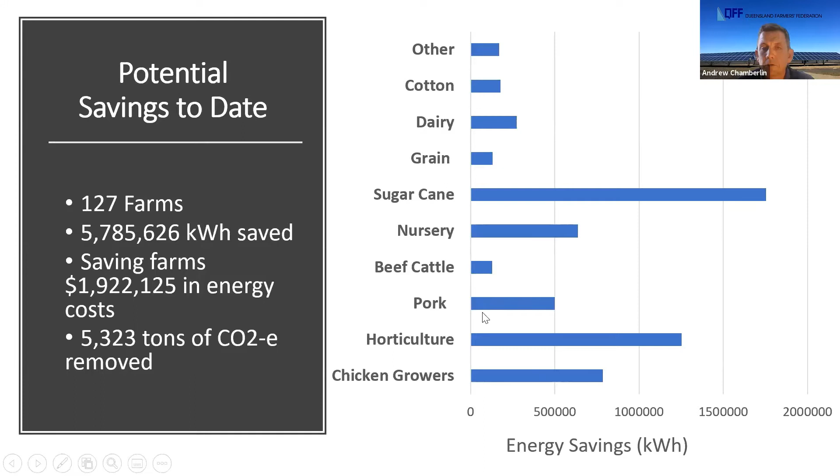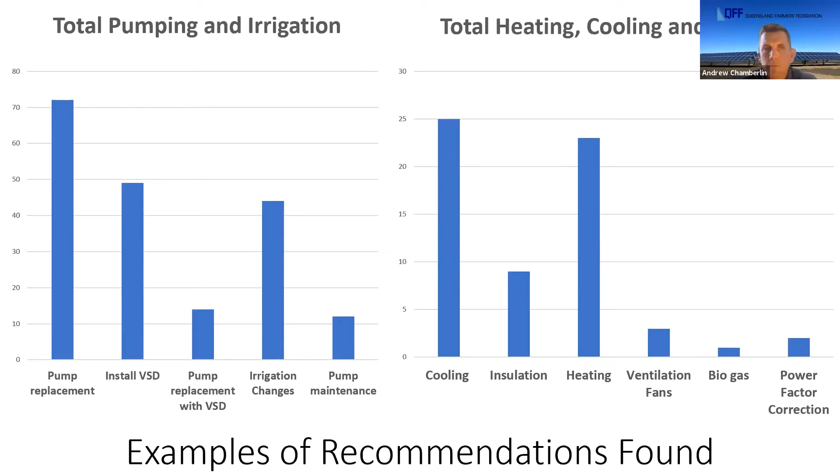These are the kinds of recommendations that we're seeing in the audits. With those sectors that I showed, it'll be no surprise that most of the recommendations are in pumping and irrigation, right through from pump maintenance through to irrigation system changes, installation of VSDs, replacements of pumps, and replacement of pump with VSD in situations. And then some of the other recommendations, there's a big range of projects in cooling and heating, insulation, biogas, and power factor correction. So we're really covering not just the irrigation systems, but the farm sheds and some of the on-farm processing.

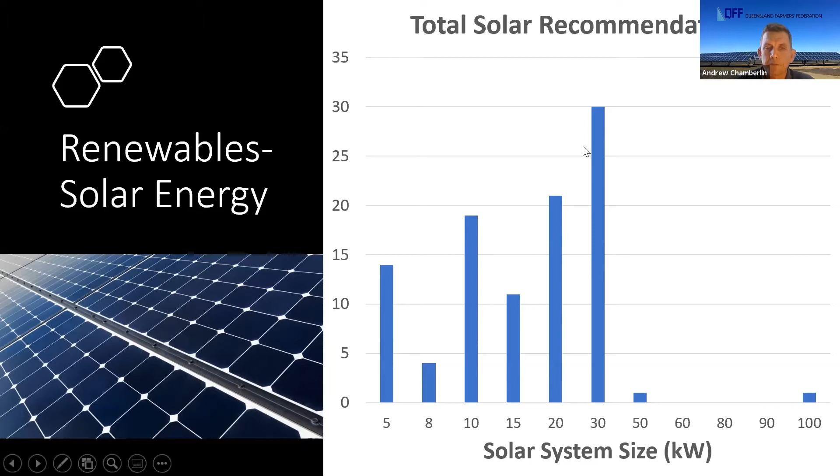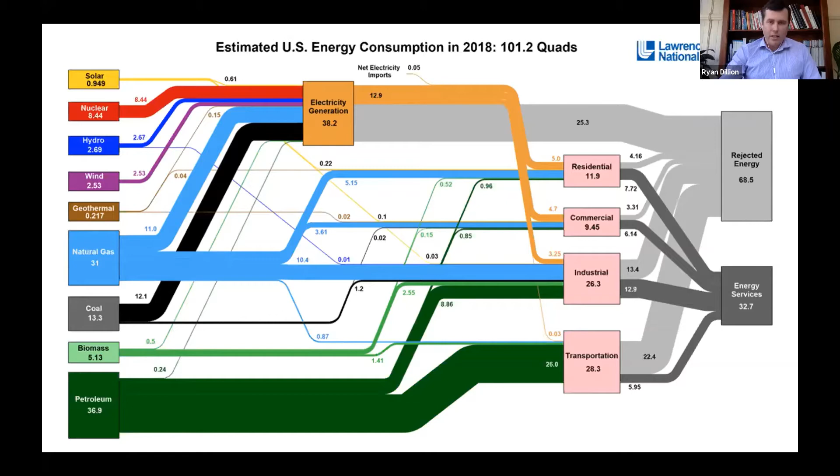So with energy efficiency being a discipline for the last 40 years, it's an interesting reflection that there is so much potential in efficiency. A lot of that's obviously inherently locked in, but there's also a lot of unlocked or unused potential in businesses. And while there's not necessarily key metrics for horticulture or dairies or nursery across the whole economy, where these audits add a little bit of value, perhaps for a little bit of reflection, is how do we actually benchmark in horticulture what that savings potential is.

We'll get to that exact number across 10 medium to large horticultural facilities a little bit later with that prize there. But otherwise, in some of those key sectors, kicking off with dairy, for instance, after the level 2 audit, in most instances for the 3 sites examined, we had between 35 to 50% reduction in energy costs available that was cost effective with a combination of energy efficiency and some advanced renewables. Really interesting to see across the board, 35 to 50% is actually still available and cost effective.

Going through what some of those jelly beans actually were within dairy, we've got a few icons here with the major energy savings, moderate energy savings using a different icon, as well as some definite priority areas of investigation and findings from the audit, just to highlight what was more or less important and what you should definitely look out for on your site.

One of the priority areas was compressed air. The chart here on the right shows the diameter of a leak, and you can see the kilowatt hours saved through fixing that leak on the y-axis. In this example, a 3 mil diameter leak, or combinations of leaks, could have around 25,900 kilowatt hours in energy wastage. Compressed air is often called the 4th utility: energy, water, gas, and compressed air. With compressed air, 80 to 90% is heat or rejected energy that doesn't provide value-added energy, and compressed air is just really expensive. So looking for leaks did bear some results within the audits, and it's something to definitely look out for in your facility - don't underestimate what that's actually costing you.

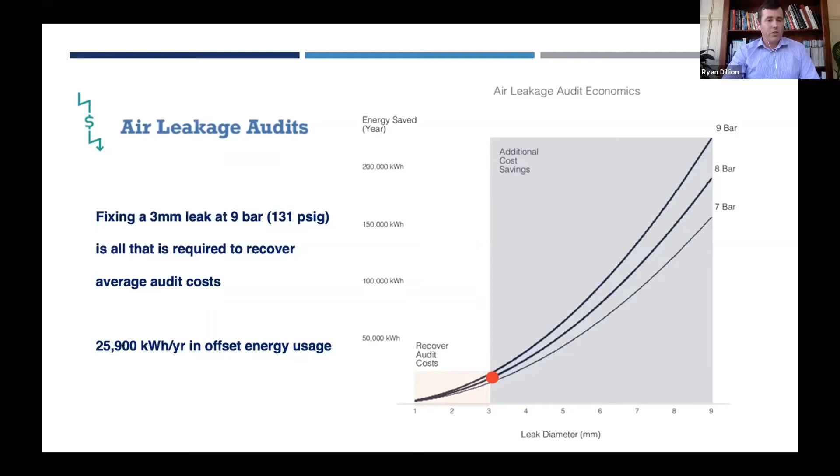Moving into refrigeration, we can see here an example of a negative feedback loop. This is a milk tank where you've got a dairy milking cows, warm milk at 38 to 36 degrees coming in, needing to be refrigerated. The thermal image on the right shows the hot air coming out of a condensing unit, refrigerating that tank in the photo on the left in the middle. That hot air is being pushed onto the tank, and some of the airflow is actually going into a set of fans and condensers on the other side of the tank.

So it's pushing out hot air onto the tank, warming up that tank. It's insulated, but it does have an impact. And then that hot air is being sucked out by some refrigeration equipment on the other side. So it's a negative feedback loop - what you're refrigerating, you're rejecting that heat and putting it back on the tank. It's a few of these smaller changes in terms of what you can actually do about that unit to change the pattern of airflow that give you these kind of simple, quick wins.

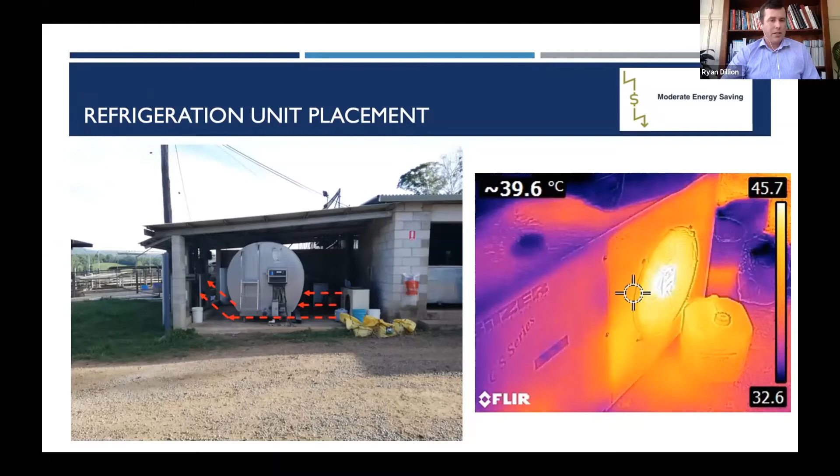A lot of the lessons from the audits were about where those quick wins were. It was the case of finding 10 to 15 of those per site, and that's what really added up to significant energy cost savings in the long term. So don't underestimate the power of trying to find your 10 to 15 projects. It can be a lot of work, but it can be really rewarding, and the cost savings really do add up - those simple quick wins such as pipe insulation.

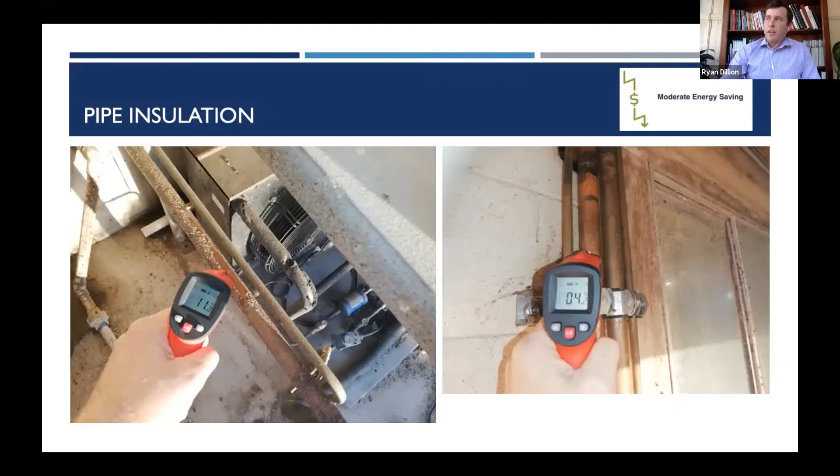Again we see a refrigeration unit, and though the heat rejected from this condensing unit is coming onto the pipe - the pipe would normally be insulated - in the handheld thermometer you can see the surface temperature of that pipe is 11 degrees. It's carrying a cooler refrigerant, and the photo on the right shows that refrigerant going through the wall, through to a milk vat, sitting at 4 degrees. So you're picking up extra temperature, and it's more or less a question of getting the house in order with some general maintenance around insulation.

Moving into more key bits of equipment within dairies, plate coolers. A plate cooler takes warm milk in, and you're using ambient water, rainwater, or bore water that you run across a plate adjacent to the milk flowing through. So you're actually getting free refrigeration, or free cooling, except for the small incremental cost of the pump. Now, pretty much most of these units in dairies hadn't had the correct ratio of flow - a 2 to 3 ratio of water to milk - to get the best heat transfer characteristics.

A lot of the time the tanks hadn't been cleaned. Some of the positioning of the storage tanks actually had heat gain just by where they're located.

In one instance, a really good quick win was we found a plate cooler where there was an irrigation channel and there was a bore. Part of the reason why the plate cooler wasn't performing was it was getting dirty from when the water quality wasn't as good in the irrigation channel. The bore water was cleaner and also colder. There was a few hundred dollars worth of polypipe that could be used to use the bore water at certain times as a cooler source. In that instance, a few hundred dollars worth of polypipe would save around $5 grand.

So definitely a few jelly beans, a few ways of just thinking about energy and how you optimize some of the existing systems.

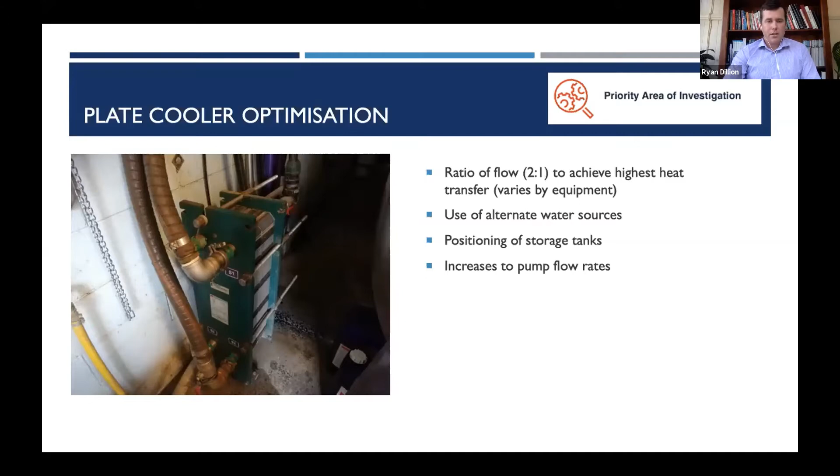Now, the solar generation, being majority in the middle of the day, means that if you installed an appropriate size solar system, you might only be utilising, in this case, 54% of the actual solar energy.

The proposed solution in this instance was actually to use solar thermal storage, or ice water mix, so that you're using solar energy to refrigerate water and even the load out, basically doing load shifting. In this instance, you're actually utilising 84% of the solar, and that had a commercial payback period of 7.9 years. So that, combined with a lot of those other low-hanging fruit, actually led to some really viable commercial potential in that energy efficiency, advanced renewable space.

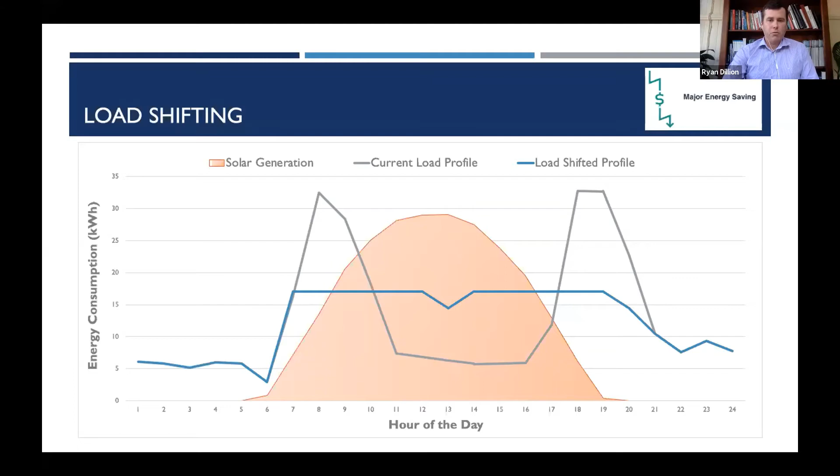The total savings were 21,000. Given the accelerated depreciation this financial year being under 150,000, you're able to claim that and some of those larger capital solar projects from an accelerated depreciation perspective. Something to obviously talk with your accountant about, but that can be included in this kind of cash flow analysis.

In summary, 110,000 upfront with higher savings in year one, and then recurrent savings of 21,000 from a simple cash flow perspective, without looking at the future cost sensitivities of energy.

Very generally, 20% return on investment, 4-year payback, and that's typical across the board for dairies, to demonstrate and give a flavour of what kind of return on investment you can get if there's budget available, if you bundle these jelly beans, these 10 to 15 projects together, combined with some advanced solar thermal storage and load shifting. It was really exciting doing some of that work.

Now, there's been a lot of sectors covered, and I know David Hunt from NGIQ is going to be going through nurseries in some of the other webinars coming up I've seen. But some quick findings here.

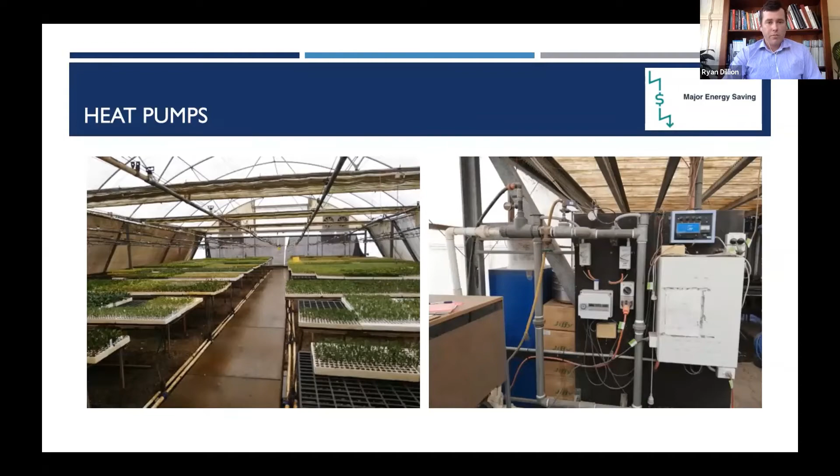Some of the quick wins and self-assessment tools for nurseries. We'll go over small irrigation pumps in horticulture, some quick wins there, and just having single phase smaller pumps.

As one case study, there was a nursery that had two bore pumps with similar flow rates, and another pump that you can just see here.

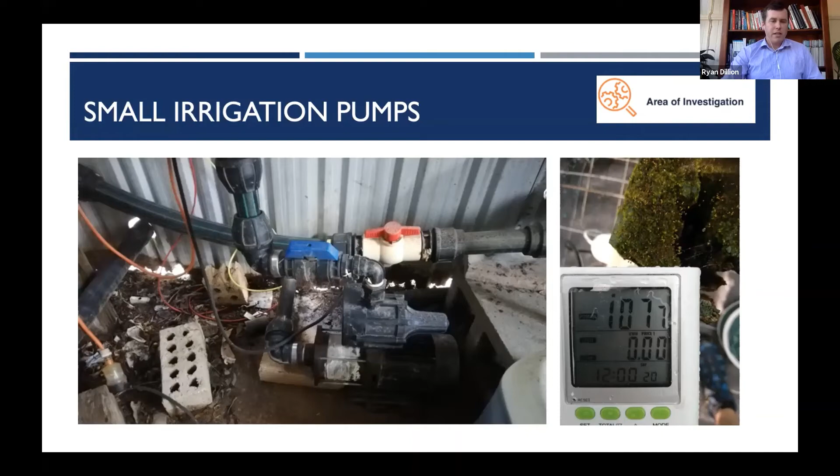Thinking about which pump to actually use, we used a simple handheld digital energy meter that you plug into your power source, then plug the motor in. One of the pumps used 900 watts, and this one used 1077 watts, so a basic 10% saving if you're picking and choosing between your existing infrastructure for what's more cost effective. It's a little example of how to self-assess and make some smart decisions there, because all these things do add up.

Very interestingly, in terms of no cost potential savings, we did a lot of work around soil moisture monitoring - monitoring what the soil moisture is at different depth profiles in soil. So at 50 centimeters or 80 centimeters, are you actually overwatering the crop, and that water's infiltrating down past the useful root zone? With the water-energy nexus, any water you save is a saving on your irrigation pumps, and therefore energy.

And there's a potential crop benefit in there, and that ties into, aside from the on-bill savings, some of those non-energy benefits.

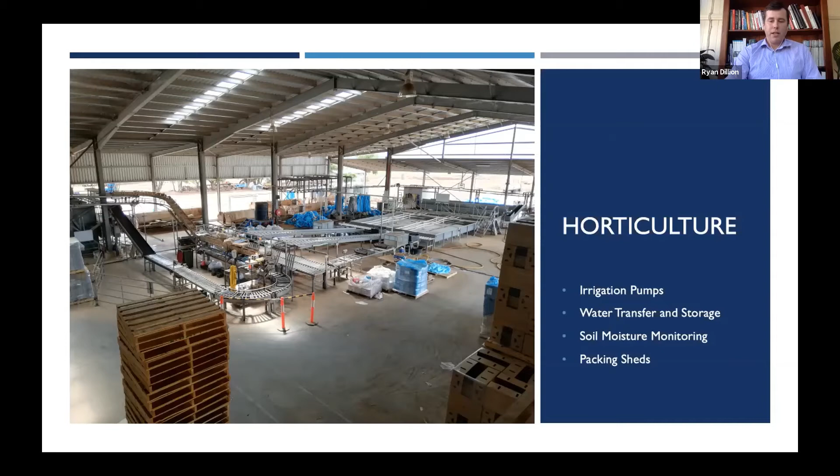A lot of the work that QFF have done has been really great - a lot of irrigation and other pumping savings have been identified. Just a couple of lessons learnt here: anything that's obviously throttled in terms of pumping can be burning through energy, and then looking at variable speed drives, optimizing your pumping to just define what an efficient pump is, and whether it's over specified or you're throttling back and burning through energy.

The accuracy of water meters is a common concern. With older water meters, there's a pretty decent case for actually having newer water meters so that you can self-assess and have the right information in regards to flow.

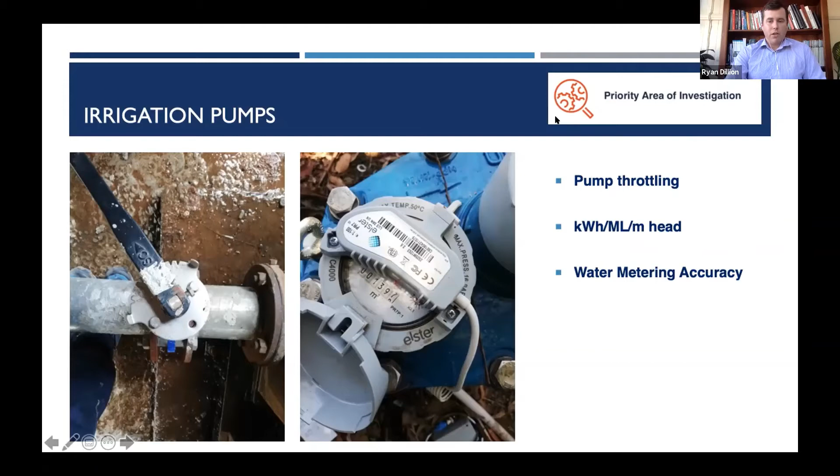Technically, the benchmark we'd normally use would be energy consumption in kilowatt hours per volume of water, which is megalitres per metre of total dynamic head. We had a range from anywhere from 3.8 to 9.5 thereabouts in kilowatt hours per megalitre per metre head. So the more inefficient the pump, usually the higher the savings, and it definitely pays to review your pump and find what kind of efficiencies are there. Looking at pump throttling, some of the quick wins are definitely available there.

Some of those other quick wins in regards to refrigeration - a lot of maintenance, cleaning evaporators, having an annual maintenance program does pay for itself.

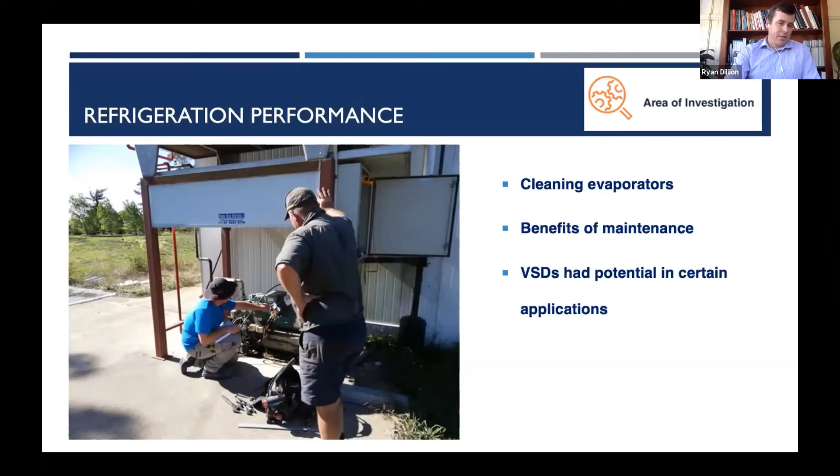Potential more holistic upgrades of cold rooms in regards to variable speed drives or complete replacement of systems. In this case study, we had the refrigeration technician on site, and the room was designed for another kind of crop, but they'd basically transferred it over to tomatoes currently. Because of that, the cold room wasn't necessarily fit for purpose, and some VSDs had significant potential in that case - but not in all instances do variable speed drives or complete retrofits of older equipment stack up. It can work case by case.

As an example of a horticulture project, nominally 9.5 in terms of that project management and energy auditing cost for around a $50,000 project, with 19,000 in savings this time. In this instance, with the depreciation, this was quite an attractive project - one of the ten had a 36% return on investment, or a 2 to 2.5-year payback period. So really attractive.

And what was interesting was actually assessing the financial return on investment from all 10 projects, in that in some instances they wanted to sign up for an energy audit and the program, and we had an internal rate of return or effective return of between 16 to 20% as a blended average across all sites, and that's still quite financially attractive.

And given that most of them, for all intents and purposes, were pretty much randomly picked, maybe 1 in 2 or 1 in 3 would have this kind of really attractive return, but from a blended average perspective, really exciting to see that there's really significant potential in energy efficiency in horticulture, and it's definitely something to look at, and another frontier of efficiency in the business to start to capture financially.

Now, it's not all financial. In terms of that business case, it's important to consider what some of those non-energy benefits are. So we have the energy or the demand or tariff adjustment savings in terms of the on-bill savings, but it really ties into how am I operating as a business in terms of water security and license to operate, and the fact that we live in a localized environment or ecology, and farm sustainability can quite often go hand in hand with environmental sustainability. From an economic perspective, local community benefits and that increased productivity.

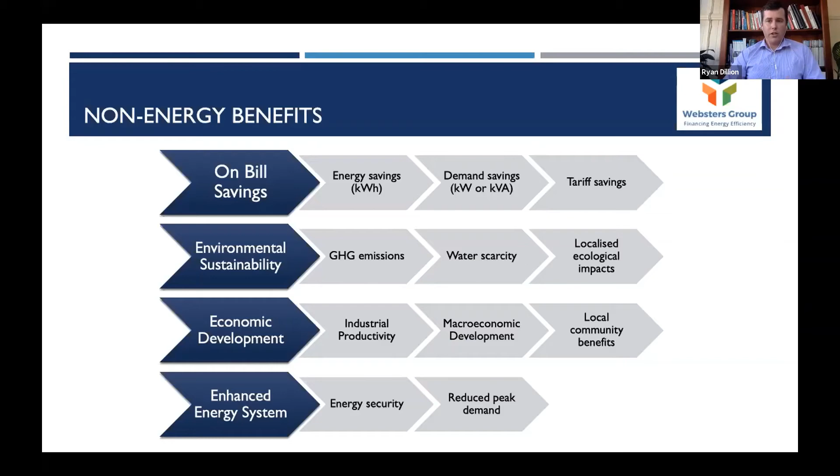And if you've done the majority of the load the day before with that thermal energy storage, even if it's overcast, that kind of islanding requirement could actually provide for a milking potentially using stored thermal energy. So not necessarily off-grid, but providing for increased security, increased energy services from that thermal energy storage kind of option there as a non-energy benefit, and something to consider.

Something we like to do, and just kind of finishing up before we get into questions here, is how do we frame these potential benefits? We had a really good discussion with a dairy farmer, and his point was, okay, we pay 70 cents per litre of milk. We currently have a net profit of 5% or after tax cash, retained earnings, not including salary within the business, as an average across that sector, just using some general numbers, 2.6 megalitres of milk a year.

And in that case study before that actually had a 20% return on investment, we asked the question, how much milk would you have to produce that would otherwise go towards that part of the bill that's pretty inefficient that you could otherwise get rid of? And it was 16%, or 200,000 litres of milk. So it's an interesting way to frame the benefits.

Say, for instance, if your profit margin in your business is 10% and you've got 10 grand savings, you might have to produce $100,000 worth of crop to provide for that part of the bill that you otherwise might be able to cost effectively get rid of. And draw it on the map. How many hectares is that? Structurally, in some senses, you can consider that an integral part of improving your profit and loss statement and actually improving farm profitability, as well as getting some of those non-energy benefits.